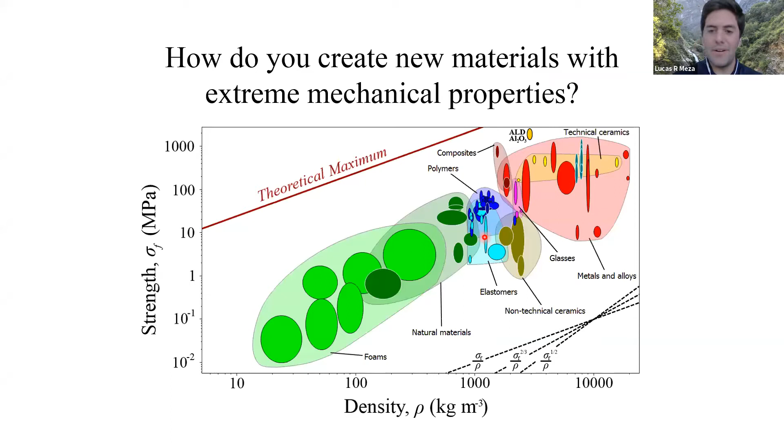And the question was, how do we do that? And the answer that I'm going to give you is we use architecture and we use nanomaterials. So my intro is going to go through those two ideas and where we see it, both in engineering, how we do it, and then why we're doing it. So to start off, architecture.

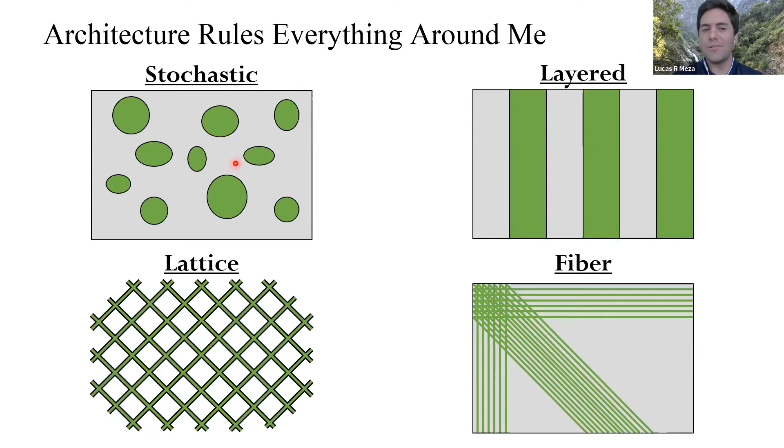So architecture is something that's very common in the world around us. So there's different forms of architected materials that can exist, different shapes that you can have things take on. These are things that you're probably very familiar with, even though it may not make you immediately think of an architected material. So here are stochastic materials you probably have sitting on your kitchen counter. It's a sponge, which has porosity to make it squishable and water absorbent.

Layered materials you're probably wearing on your feet right now, maybe not because you're all at home and who wears shoes at home, but you have multiple layers of the shoes that give it a certain compliance, a certain squishiness to make it comfortable to walk. Lattice materials, anytime you get a box from Amazon or wherever, the corrugation here in the cardboard is what allows that paper material to then be stiff in bending and then strong axially. So you have this corrugated plate that you're using the corrugation to give you some new property.

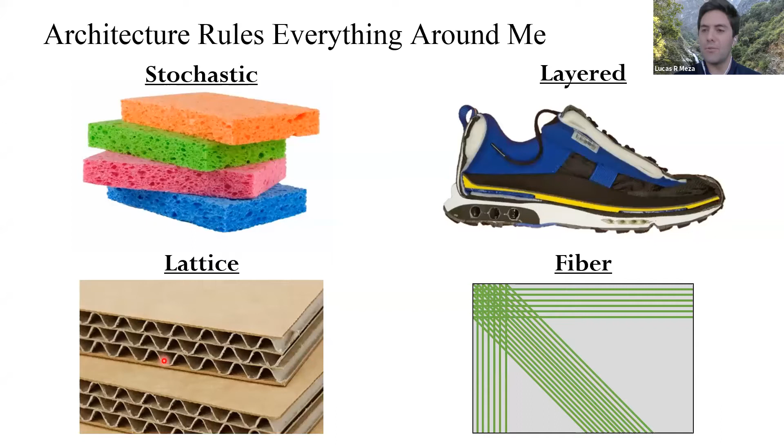And then fiber materials, you're definitely all wearing. Our cloth material, the fabric that we wear every day is actually a woven fiber. So very rarely do we wear monolithic sheets of something on top of us. It's actually very small fibers that have been woven together. And the pattern of the weave and the architecture of the weave is what gives it properties. That extends into carbon fiber composites and other types of fiber composites, ropes or fiber composites.

So architecture in engineering and in the world around us is very common. And that's kind of our starting point for when we think about architected materials, is we want to use some of these concepts of architecture now to design better materials. So architecture has been used all throughout human history. The earliest example was probably straw and mud brick reinforced houses thousands of years ago. In recent years, there's been a set of fabrication techniques that have really allowed us to scale down how we can introduce controlled architecture into materials.

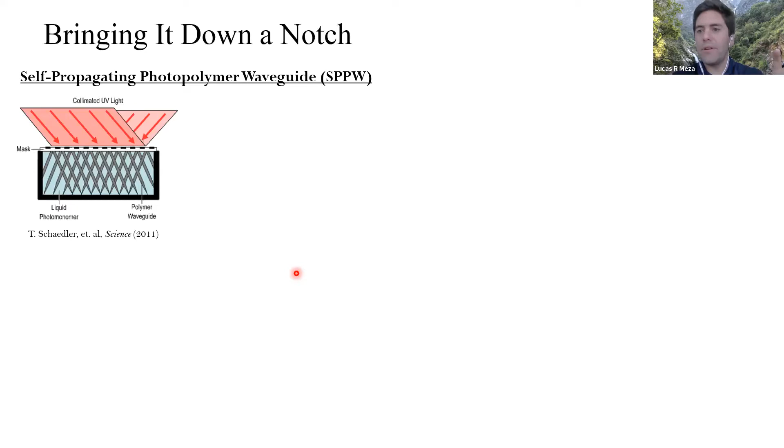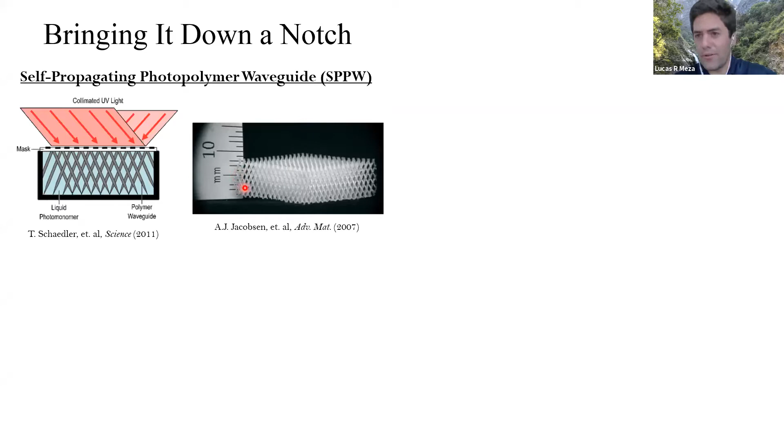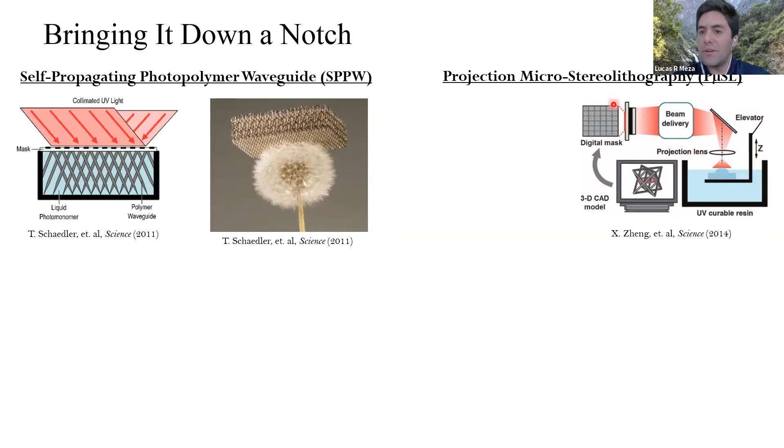Around the same time, most of you are probably familiar to some degree with stereolithography. So like a Form 2 3D printer uses stereolithography. Around the same time as this work was coming out, people were working on microstereolithography, so taking phase masks and putting them through projection lenses to make very small featured structures. So now we could create structures with the same complexity, but with an arbitrary architecture. So here, this is a hierarchical lattice, which I'll talk about a little bit later in my talk.

The technique that I still use here pretty heavily is direct laser writing, or 2-photon lithography direct laser writing, where we take an infrared laser, shine it into a photopolymer, and we're able to make structures that are smaller than these techniques are able to do, not quite as small as a self-assembled block copolymer structure, but we're able to introduce an incredible degree of complexity into something at near fundamental material length scales.

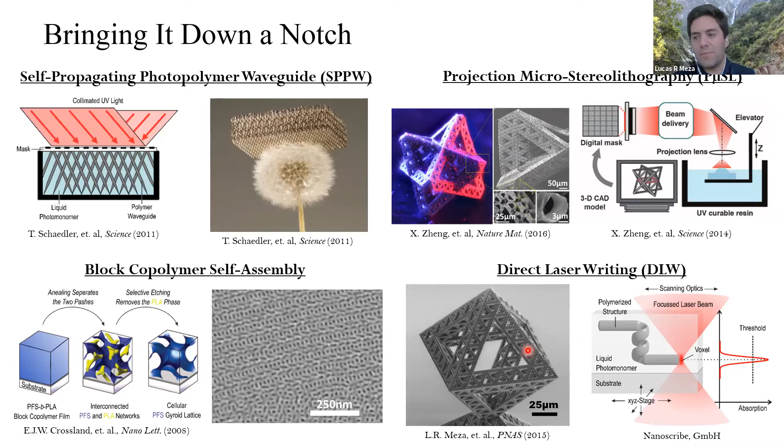So what's the point of that? Why do we want to make things so small? Well, it turns out smaller is sometimes better. Smaller is more interesting. So this was a lot of the work that my PhD advisor Julia had done during her PhD. When you take single crystalline metals and you make them smaller, you get a statistical increase in strength due to a range of effects. But basically, as you reduce this size, your strength gets stronger and stronger kind of exponentially.

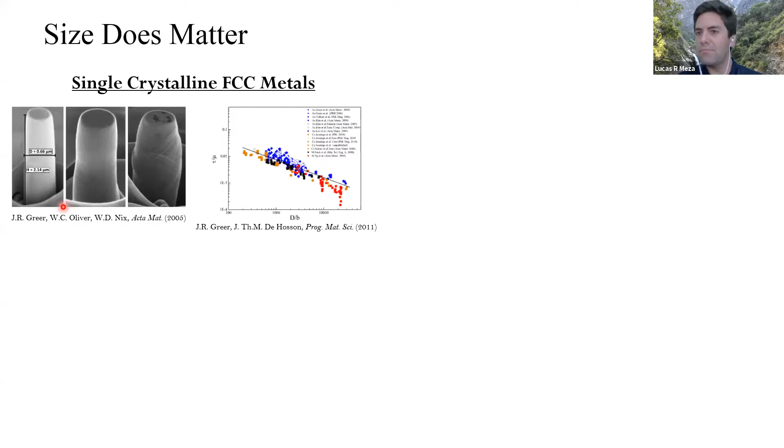So if you're able to make something that's 10, 20 nanometers in diameter, you get near the theoretical strength of the material. For intrinsically brittle materials at the macro scale, you can actually have them become ductile at the nanoscale. I don't know how many of you are familiar with metallic glasses, but it's an amorphous metal material that is generally fairly strong but brittle at the macro scale. You can actually get to length scales where you can suppress that brittle shear band localization, and you can get some ductility into your intrinsically brittle material.

That said, size isn't always good. If you take a nanocrystalline material, adding the free surface actually allows grain boundaries to slide out, so smaller is weaker. So size matters and nano architecture matters.

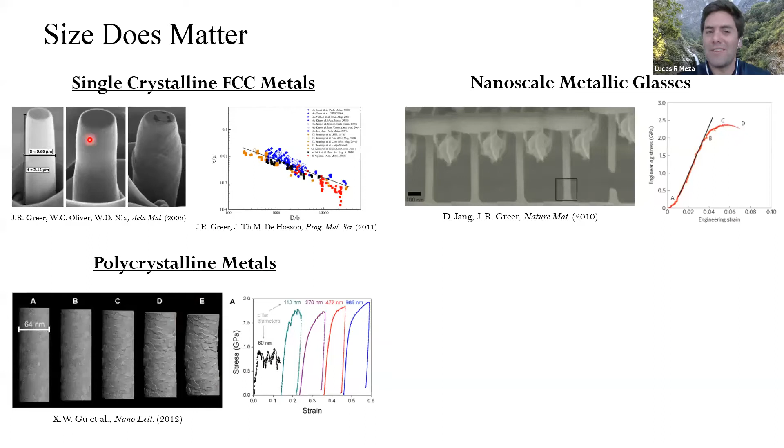So nanomaterials are interesting, and they exist everywhere in the world around us, but the question is, how do we use them? Now we're trying to use this idea of architecture to couple nanomaterials into our mechanical properties. Once we have nanomaterials, we have to decide how we want to shape them. There's a whole bunch of different ways we can create structures with different shapes. A lot of the work I had done early on was on lattice structures.

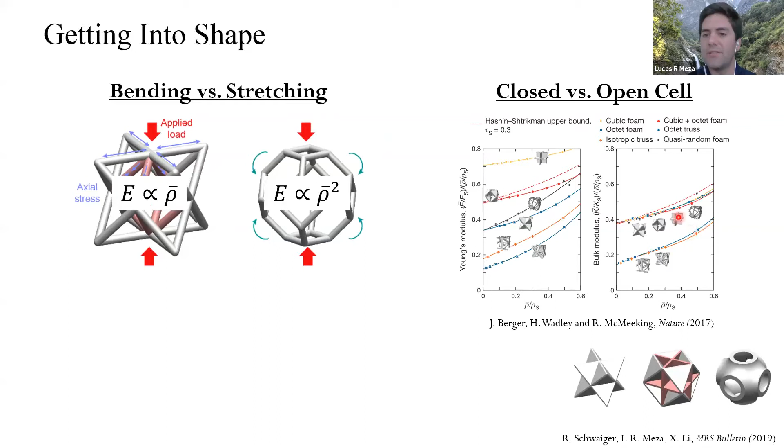In general, though, people have found that lattices don't scale optimally. And actually, if you go to a closed cell architecture, you can get better mechanical performance. Here you can see lattice architectures versus closed cell architectures. Even stochastic closed cell architectures generally perform better than lattices because walls are better at carrying load than beams. There's other reasons why that isn't necessarily ideal, and I'll talk about that also later in the talk.

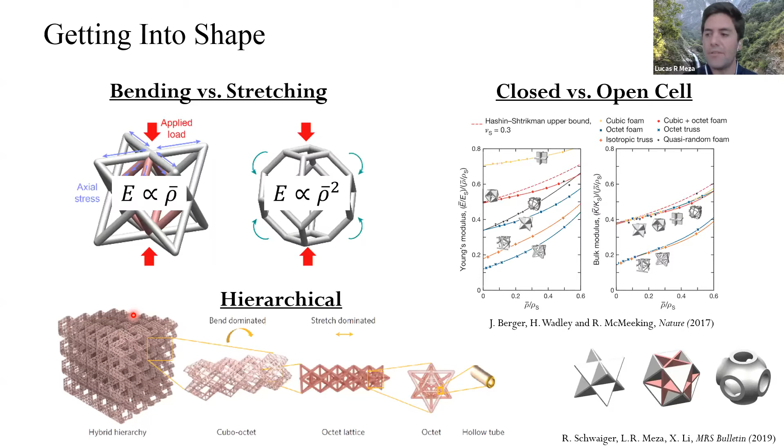And then introducing hierarchy into our geometry. So now that we can make whatever shapes and architectures we want, we can start introducing structures at different length scales to feasibly get different properties. So I could combine a bending structure at a small length scale, a stretching structure at a larger length scale, and a tough or a negative Poisson's ratio structure at another level. And we can do that all in our design. So we can design these different structures at different levels with different architecture to bestow different properties.

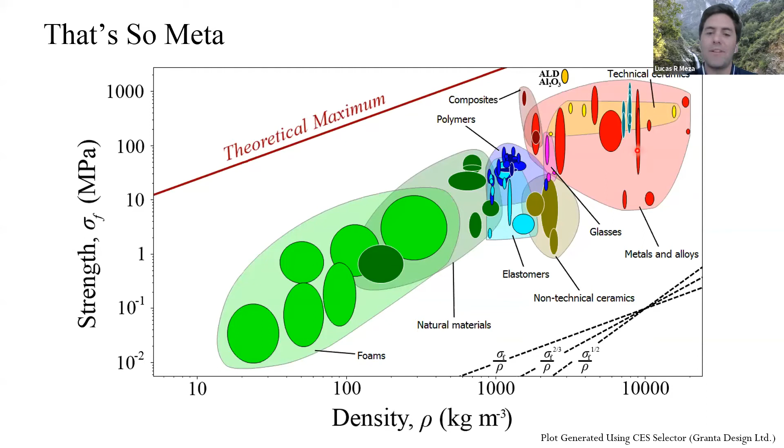What have we gotten so far? So let's go back to our Ashby plot, again, strength versus density. If we look at what some of those fabrication techniques have bought us, it's been able to extend that material property space. So here, we've been able to make things that are fairly heavy and very, very strong. This is amorphous carbon, which I'll talk about later.

We can make lightweight materials that are as light as wood, but as strong as a steel. We can make ultra lightweight materials, which I'll also talk about later in the talk. We can make fully dense materials that are actually stronger than their base materials. So this is a porous copper, which was 60% dense and still had a higher strength than the actual bulk copper that it was made of. And that's because of those material size effects that I had been talking about earlier.

So there's a whole bunch of interesting mechanical properties that we've been able to get, but this is only one narrow slice of the material property space. So this is strength versus density. There's a whole metamaterial property space that we can start to explore with these fabrication techniques, which isn't necessarily what I have focused on, but what there are a lot of people actively working on.

So here we have auxetic materials, or negative Poisson's ratio materials where when you push on them, they contract, and when you pull on them, they expand. Pentamode materials, which are a meta fluid. So if you think of water, water has a bulk stiffness, but no shear stiffness. You can flow water, but you can't compress it. Here you can create a solid material that actually has almost that property. It has some bulk stiffness, but it has a very low shear stiffness. And it turns out that's interesting for cloaking.

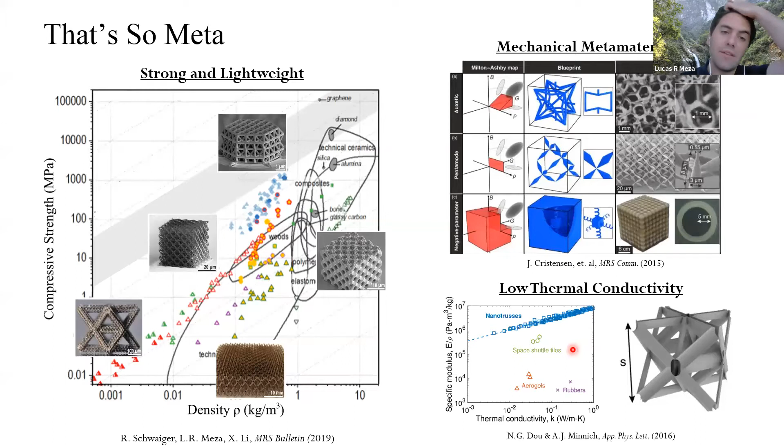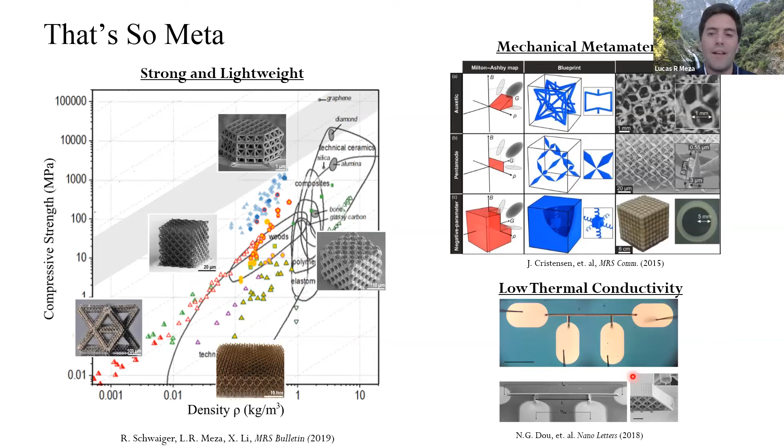And this has applications, for example, as space shuttle tiles, where you can create something that's ultra low thermal conductivity, that's shielding, that's crack proof. And that's really what we're trying to go for with these. So this was a numerical study. They were able to validate some of those properties experimentally a couple years later. So I'll come back to this point later on in the talk.

So now I'm going to talk a little bit about what I had actually worked on prior to coming here, or what my PhD work had been on. So a lot of the fabrication that we do is based around two-photon lithography. It's not necessarily a technique that I'm married to, but it's a useful prototyping tool. So effectively what we have, it's a nano 3D printer.

You shine infrared light into your material. Infrared light alone isn't enough to cross-link the material. So anywhere the red light shines doesn't cross-link, it just stays a gel until you get to a very narrow focal point. And here, at this narrow focal point, you have a statistical likelihood of getting 2 infrared photons absorbed. So those 2 infrared photons have the same energy as 1 UV photon, which most of these photoresists are designed to cross-link using. And so you only get cross-linking at that focal point.

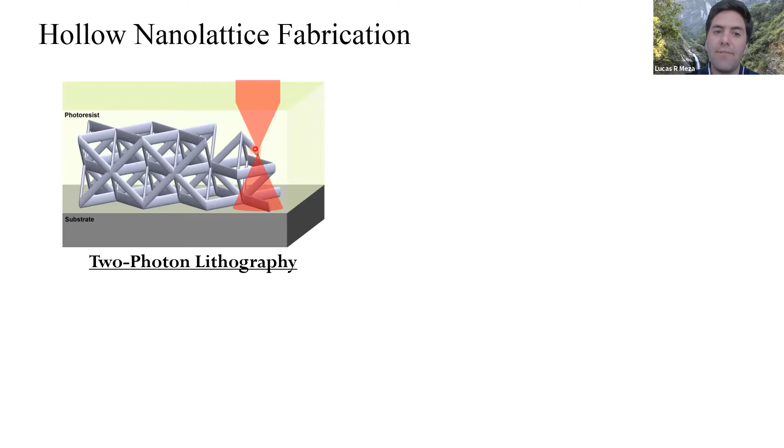And so what this looks like, there's actually a couple different writing modes you can use. Here, you can actually write fully 3-dimensionally. So you're not limited to layer by layer writing.

You can see there's a piezo stage that this is attached to, and it's writing these octahedrons fully in space. Or you can do layer-by-layer writing, which is generally faster, but then you get the stair-stepping phenomena that you see with most 3D printers.

At the end of this, you end up with a photopolymer, or polymer structure. That polymer alone has some interesting properties, but most of the time we use it as a scaffold, so we take that polymer structure and do something to it. In my PhD work, that involved using thin films to coat it. We're still doing some of that here, but we're also using pyrolysis to turn it into different materials.

So here, that coating process: you take a polymer, use a thin film deposition technique such as atomic layer deposition to coat it with a thin layer of something, in this case aluminum oxide, because you can ALD any material as long as it's aluminum oxide. We take that aluminum oxide, use a focused ion beam to narrowly expose the edge of the material, use an oxygen plasma to burn it out, and we end up with a hollow structure.

So I'll show a few videos now on these hollow alumina lattices, hollow alumina nanolattices, and what their properties are. Dimensionally, we can control the thickness of ALD effectively to the nano level, to the atomic level. We can get 10 or sub-5 nanometer thin films of aluminum oxide, which is effectively 15 to 30 atoms across. So we're really getting down to the scale where we're controlling the atomic organization of these structures.

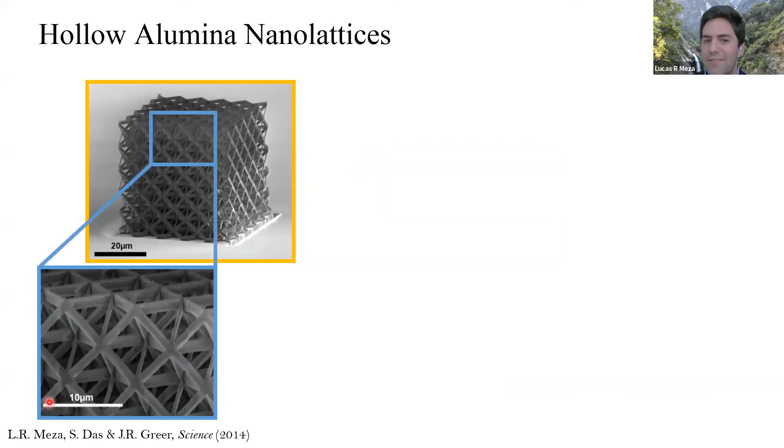So 50 microns total structure. These are built with unit cells that are on the order of 5 to 10 microns. And then at the smallest level, these are hollow tubes with thicknesses on the order of 10 to 100 nanometers, which we can control pretty well.

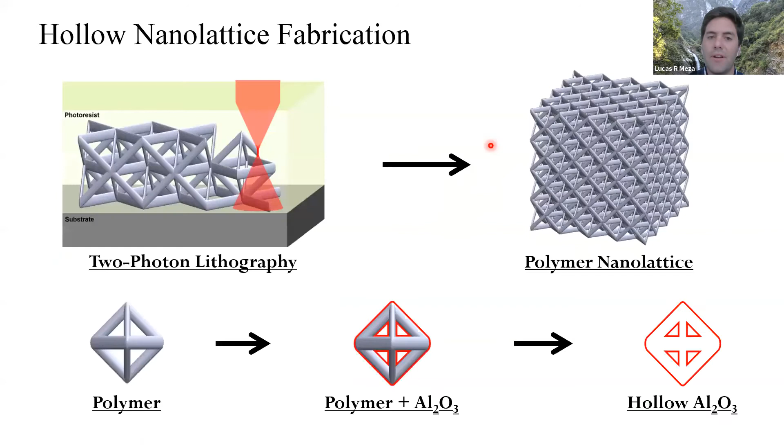So this is a cut section - this is an octet truss, hollow. Again, you have the size of the structure, the aspect ratio. Unfortunately, as a byproduct of the fabrication process, you end up with an elliptical cross section. So two-photon lithography gives you an ellipsoid as your unit, which is not the end of the world, but it is what it is. You can build it up to make circular structures, but then you have larger features, and the mechanics change slightly. I can talk more about that if anyone's interested.

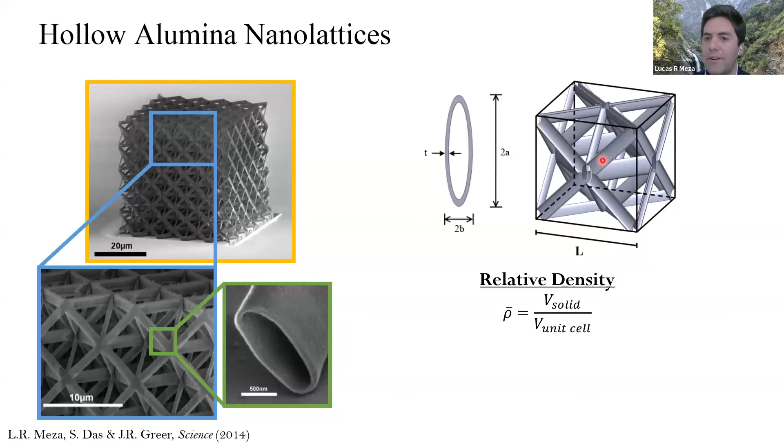But there's a couple figures of merit for these materials that I'm going to point out now. First is relative density - anytime you're making a lightweight material, the amount of material in there, the volume of solid over the volume of the unit cell, is the most important figure of merit. From there, you can approximate certain mechanical properties. Certain things like stiffness and strength were theoretically said to scale with relative density, depending on what the constituent material is and how much stuff is in there - so the relative density to some exponent. It turns out to be a little more complicated than that, which I'll get into, but that's the basic idea.

So now I'm going to show a video. This is our alumina nanolattice. Alumina, remember, is a ceramic - brittle, catastrophic failure. If you compress it, think about compressing a coffee cup and what you would expect to happen, or dropping a coffee cup. It's kind of a brittle, catastrophic failure.

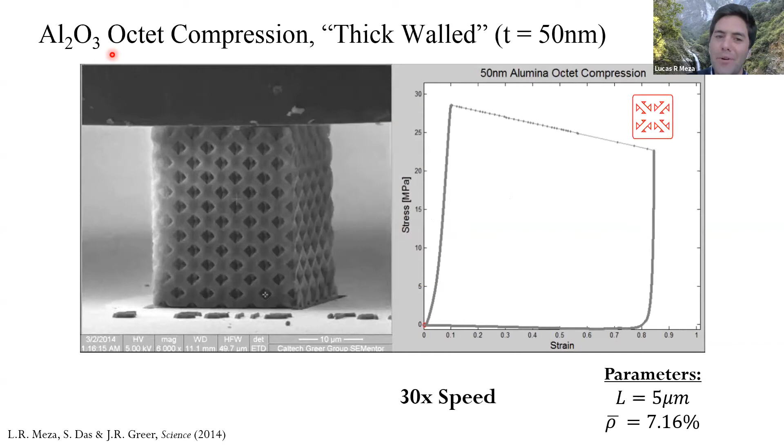So this, I'm going to say, is a thick-walled structure, thick here being 50 nanometers - that's the length scale we're working at as a frame of reference. In compression, we get reasonably high strength, reasonably stiff performance, but brittle, catastrophic failure. There's a single large strain burst, and the whole structure crushes.

It was pretty light, it was pretty strong. As an engineering material, those are useful properties, but if you imagine using this as part of an airplane wing, you wouldn't want your wing catastrophically exploding in midair. So how do you get around that?

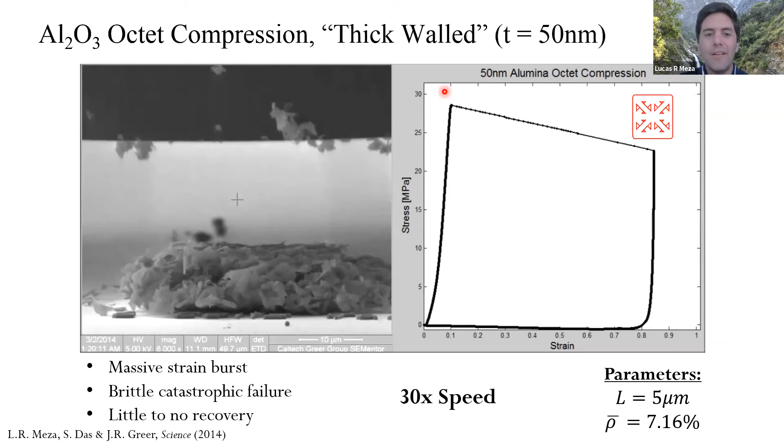So here we had taken that same Alumina octet, used the same architecture, the same material, the same geometry, the same everything, but now reduced it to be thin-walled. So here now this is 10 nanometers instead of 50 nanometers. We kind of came upon this serendipitously, and what we found in playing around in this parameter space was quite a different behavior.

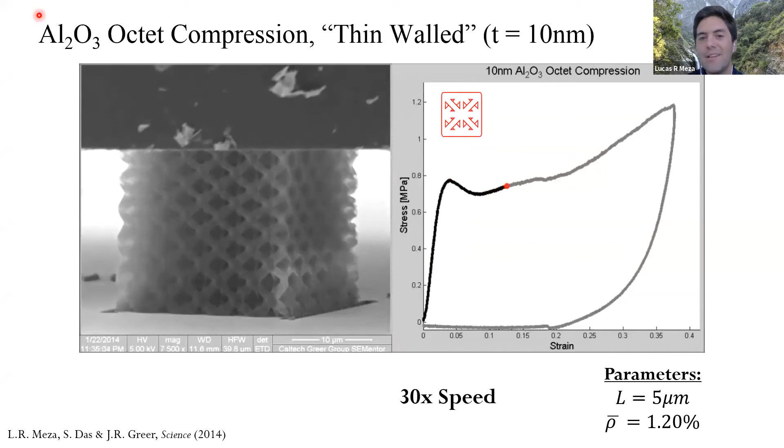Now, instead of that catastrophic brittle failure, you can see this gradual ductile deformation up till about 40% compression, then we unload, 40% compression, then we unload. And actually it bounces almost all the way back. Some of these structures actually recover 98, 99% of their original height, which is pretty remarkable given what we had seen for the fully dense, or thicker walled structure.

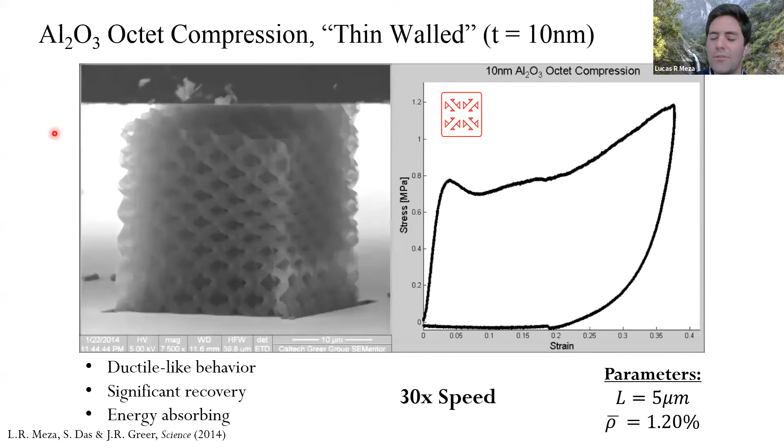So what's happening here? This 10 nanometer one, across all these different unit cell sizes, was able to recover. There's a gradual transition as we increase that wall thickness from a ductile recoverable behavior to a catastrophic brittle behavior. What's fundamentally happening is when you compress this thing, you have a hollow, thin shell that, if you imagine trying to crush a piece of paper, isn't going to fracture, it's going to wrinkle. So here we're actually seeing wrinkling or shell buckling in the wall, this hollow ceramic wall.

After we unload, we do see cracks form. There's some cracking that exists, which is why we don't see full recovery. But globally, the node remains intact, so the structure is able to recover. There's no plasticity mechanisms because it's a brittle material, so it's either broken or it's not broken. And if it's not broken, it's able to bounce back, although it loses some of its integrity.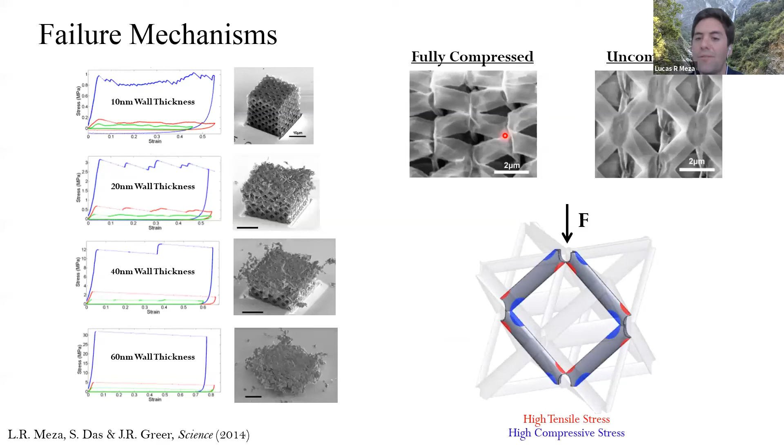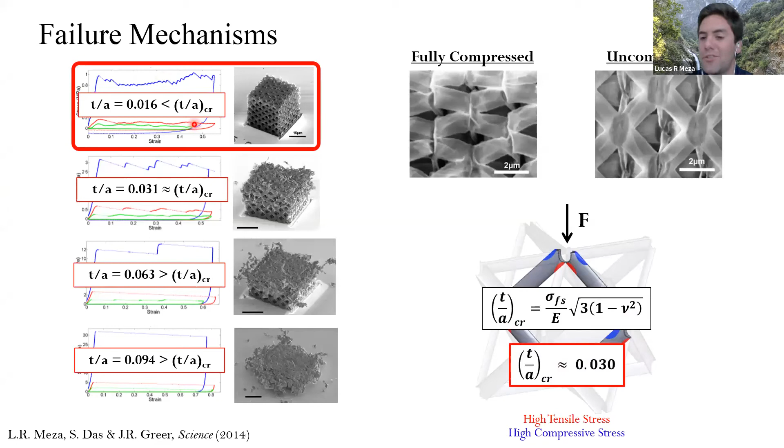So here we can determine a transition between those two behaviors. If you look at a cross section in compression, you have regions of high tension and high compression, and basically a competition between rupture in areas of tension and buckling in areas of compression. You can relate those two, and say either it's going to fracture or it's going to buckle. We have a relationship for shell buckling, so you can come up with a critical transition point, plug in some material properties, and say anything below that critical transition, i.e. our thin walled structures, will be shell buckling dominated and able to recover. I'll come back to that a little bit later in the talk.

We played around with hierarchical nanolattices too. I'm not going to go into this too much, just going to show it off because they're cool pictures, and there's a nice video that goes along with it. So here, this is a third order hierarchical structure. It's a lattice made of lattices. You can see the lattice subunit there, the lattice unit there, and then the lattice there.

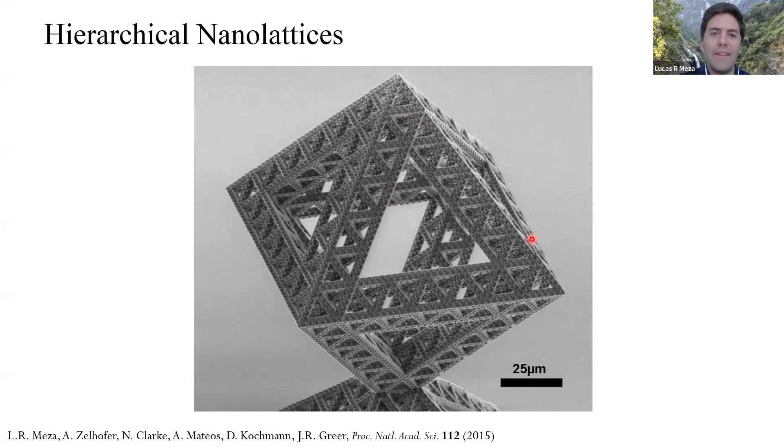So here, I'm going to show you cyclic compression on a third order half cell. Basically what we were looking for was how this hierarchy in a single beam changed behavior. So here you had a stiff, strong initial loading cycle. After that, you can actually see some of these cracks and voids starting to open up. You can see, especially here and here, cracked parts of the beam.

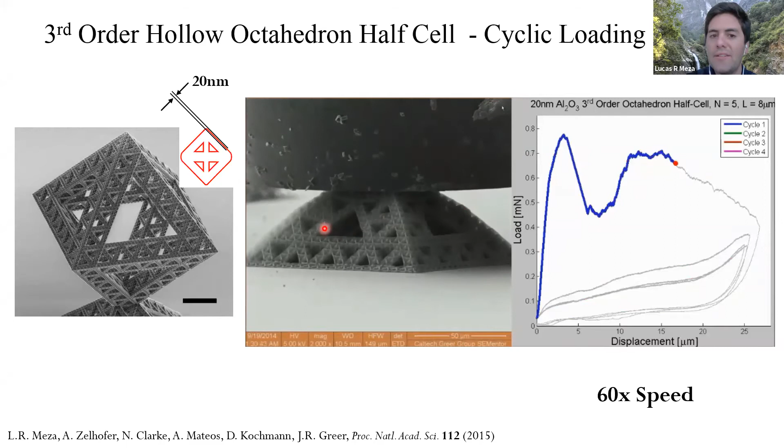Cracked parts of the beam stay cracked, and you have basically buckled pathways that form, which reduce this initial peak load. But then you get to a pretty stable load cycle after just one or two cycles. So even though you lose a lot of that initial integrity, you're able to recover a bit better.

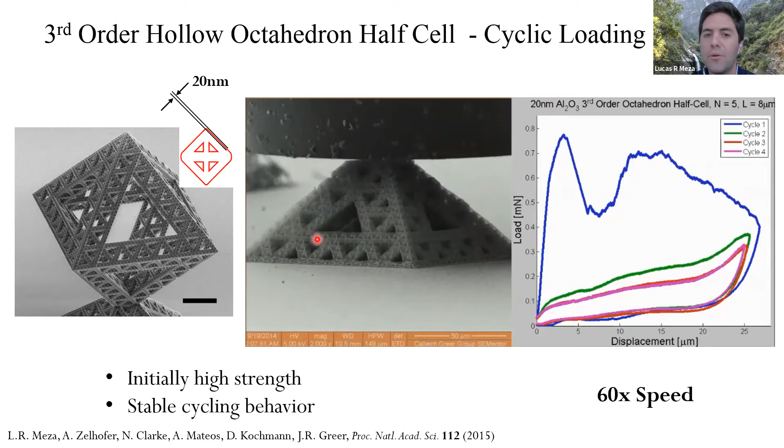So what this hierarchy buys you for this particular lattice is you're able to localize the failure more. You're able to localize failure to discrete beams in the structure instead of parts of the shell wall, and that inevitably gives you better recoverability because more of the node or more of the beam stays intact. So I'm not going to dwell on that too much.

Here, I'm going to pull us back to our property space. You'll notice I extended this out quite a bit. Here's that density versus strength. You'll notice here at the top, this yellow bubble is ceramics. Here, that ALD alumina, ALD Al2O3, this is the material we were using. It has yield strengths on the order of 2 gigapascals, much higher, especially in tension, than a normal bulk ceramic would be.

From that, now we can see this is where our monolithic lattices fell. If I drew a line up to that, this line would effectively intersect my ALD alumina. So we're getting higher strength, or higher stiffness, at the same density than normal foams. That's primarily driven because we're using a stronger constituent material.

For the fractal lattices, we were actually able to get ultra low weights, which was interesting. If you imagine cranes in construction, the reason we use cranes is because you can extend your size while reducing your weight. You wouldn't want a solid steel beam as a girder for a crane. So here, effectively what we're doing is creating a structure that mimics that.

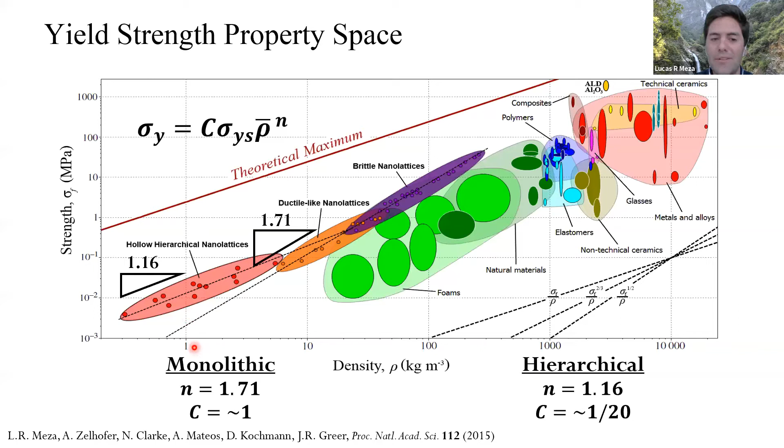Interestingly, as a frame of reference, the density of air is about 1.2 kilograms per meter cubed. So we were actually making structures that were about a third or a quarter of the density of air. That technically makes these air composites, because air makes up a considerable fraction of the weight of them. Anyway, I won't dwell on that too much, just a fun fact.

But here you'll notice if I draw that Voigt line from my ALD Al2O3, that straight line, we're about a factor of 20 off from where we theoretically could be. So here we're getting good performance, we're getting ultra lightweight, we're reaching new property spaces, but we're still really not reaching into this white space the way we wanted to.

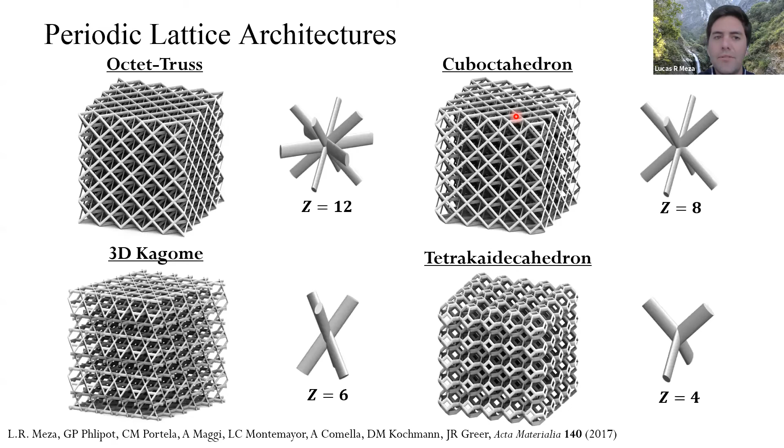At this point, I had a question of why are we using lattices and what's the point of using lattices in these structures? So we went through a whole bunch of different types of lattices. Here's 4 that we ended up focusing on: octet truss, cuboctahedron, Kagome, and tetrakaidecahedron, made lattices out of those. These have different connectivity at their nodes and theoretically are rigid, periodically rigid, or non-rigid.

What that means is, this octet truss is a pin jointed 2D version. This is fully triangulated - if I push on it, it doesn't move. This has no triangulation - if I push on it, it falls apart. And then the cuboctahedron and the Kagome, basically anywhere those triangles are is a rigid element, and then you have periodic deformation around those in theory.

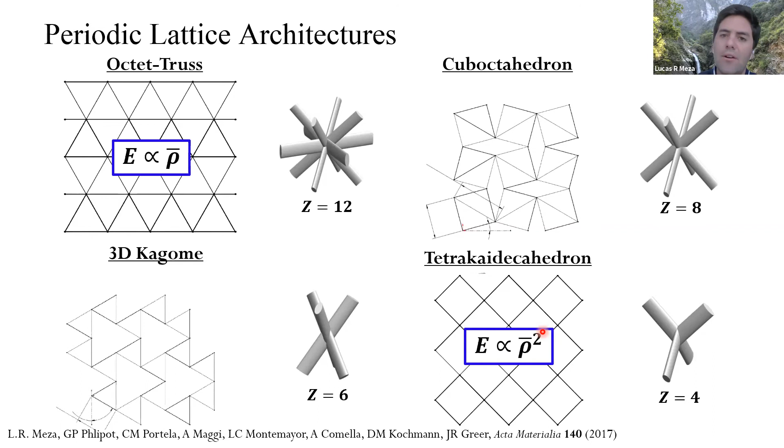So those are in principle supposed to scale linearly with relative density, and quadratically with relative density. This is kind of what all the lattice theories had told us, or at least what we were starting to go on. So when we look now at a property space, here's those 2 scaling lines: E is proportional to rho bar, E is proportional to rho bar squared.

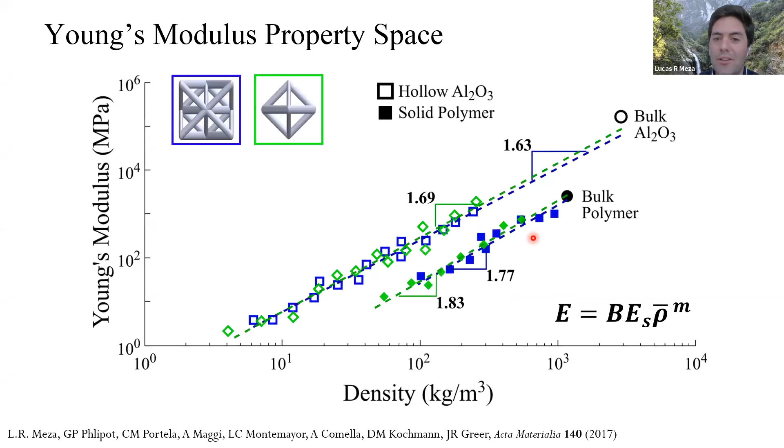We actually didn't see that behavior at all. If we look first at the octet truss, we see it's neither the squared nor the linear scaling, both for hollow and solid beam structures. For the cuboctahedron, Kagome, and tetrakaidecahedron, all of these actually collapsed onto each other very strangely. So it seemed at first glance that architecture had no role at all - that all of these different lattice architectures, even though this was supposed to be stretching dominated, this was supposed to be bending dominated, actually didn't make a difference, which was somewhat off-putting.

So we dug into it a bit more. Here, these are our experimental parameters, or experimental values. We did corresponding numerical simulations to match those, and we found that basically in the relative density range we were exploring, the beams themselves weren't the dominant factor controlling the mechanical properties.

It was actually the nodes. So here, when you make very dense structures, the nodes take up a considerable volume fraction of your material, and you can't consider this as a beam-based structure.

It's a combination of beam and node structure. And so when you get to very low relative densities, you actually get to that theoretical scaling that you're supposed to have, but here at high densities, you don't have that. And so in a practical sense, it's very difficult to make structures that are much lighter than 5-10% relative density, because you start ending up with them collapsing under their self-weight. Any sort of imperfection can lead to catastrophic failures. And so this was a problem.

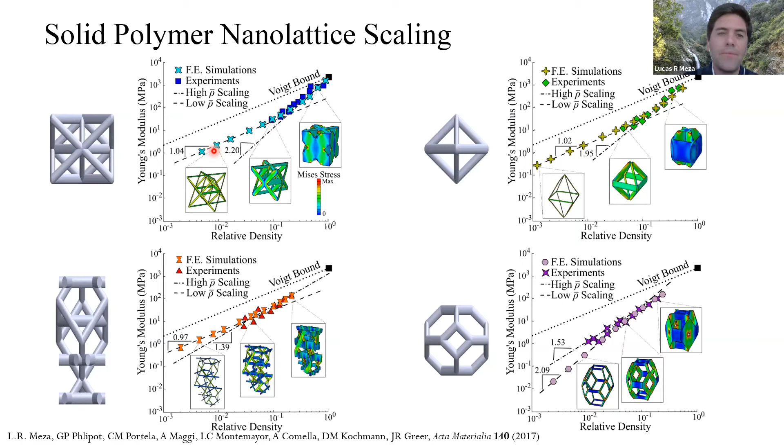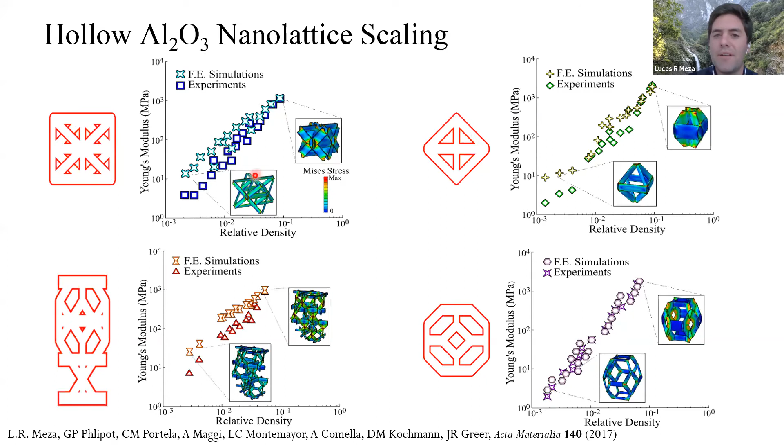So it seemed for a second that lattices weren't necessarily the way to go. Shell structures are supposed to scale more optimally. And so here, those are our shell results. We ran corresponding numerical simulations on matching parameters, and then we looked in a little bit more detail on different parameters. So here, those are our experiments. These are our matching parameters. When we started looking at different property spaces, we actually saw pretty drastic shifts in behavior.

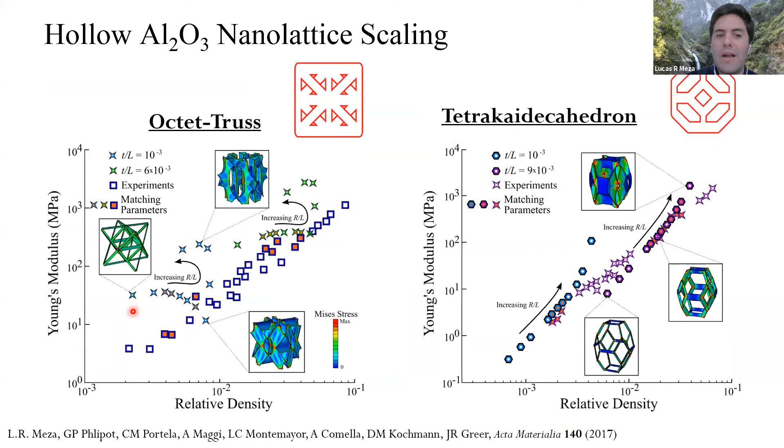So there were actually odd transition points where at the same relative density, you could get an order of magnitude change in properties by changing exactly how the load was being carried by the shell. So here you have load concentration points, sharp corners. Here it gets to the point where it's just rounded out enough where you transfer the load differently in the shell wall, and you're able to drastically increase your performance.

These were numerical simulations. We haven't actually done the corresponding experiments to validate these, but there's other reasons that we haven't, and I'm going to get into those a little bit later. Recoverability. I have 15 minutes left, so I have one more slide on stuff that I've done before, and then I'll get into stuff we're working on.

So recoverability was the other big question. So there was a question of how do we make stuff lighter and stronger? How do we push this way in the relative density space or in the stiffness strength density space? But then there was also this other issue of recoverability. So we wanted to quantify the amount that these structures recovered. This is a Kagome lattice compression.

We defined a figure of merit, percent strain recovery, maximum minus residual strain. So if it recovers fully, then you have a percent strain recovery of 100%. If it doesn't change at all, if epsilon residual is equal to epsilon max, then you have 0% strain recovery. And so, for example, this is 68% strain recovery.

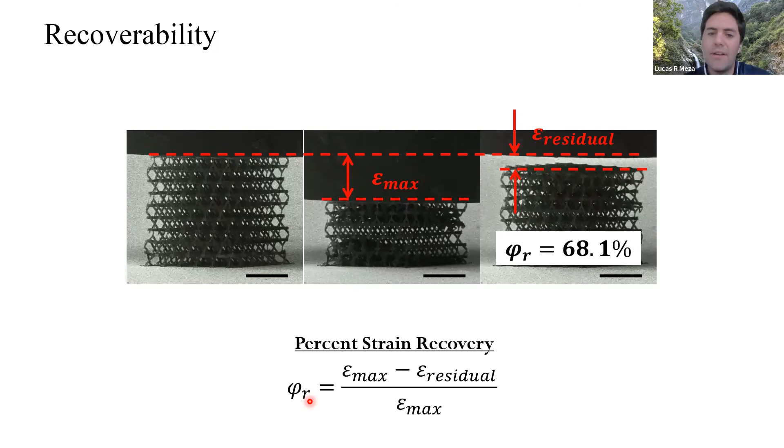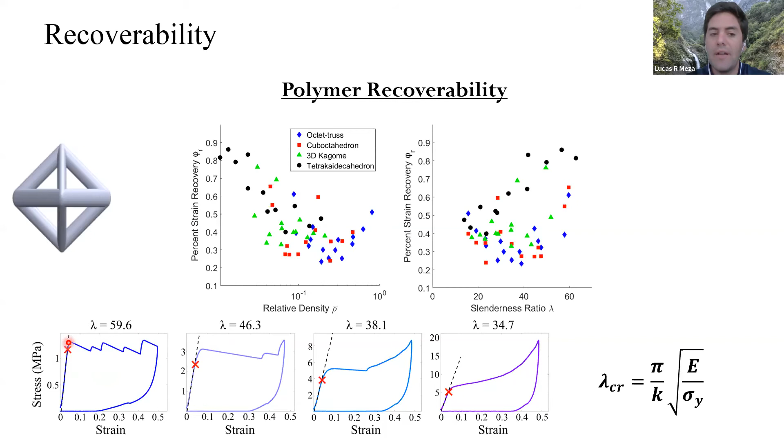So we looked at polymer structures. With polymer structures, you can define a figure of merit lambda to define the slenderness of a beam. You can relate that to the buckling limit of the beam, and you can find a critical transition where you will go from an Euler buckling dominated to a yielding dominated behavior. And so you can see here the qualitative changes in behavior, the sort of bursting event. These are Euler buckling events, and this is a densification and plastic yielding.

But we found that slenderness of the structure didn't actually correlate very strongly to recovery, and more so the density loosely correlated with recovery, but even then there wasn't a strong trend, especially across all the different architectures that we looked at, which was interesting.

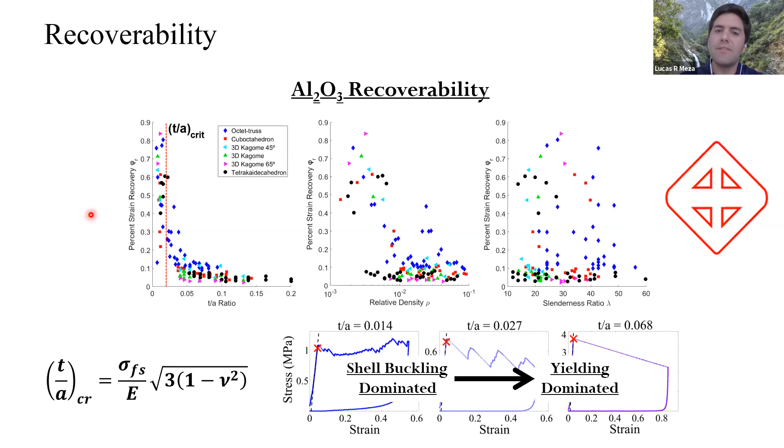But we were still seeing structures that had a fairly low T over A that didn't really recover. So you notice there's a very wide spread, even when we get past this ratio, where some structures were and some structures weren't able to recover. So this was kind of a weird open problem. And this is one of the big things that I'll get back to. So that is basically most of the work that I had done during my PhD.

I'm now going to get a bit into what we're actually working on now. So the problems that we've been trying to address, how we've been tackling them, what questions we're trying to answer. So one of the big questions that we had was, how do you increase specific strength and specific stiffness?

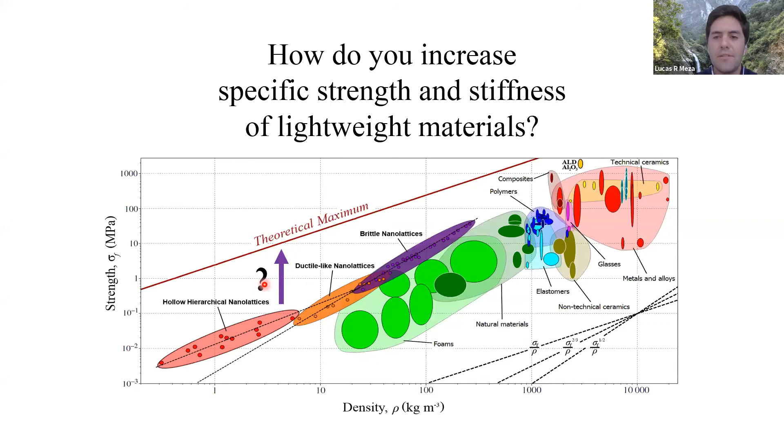So how do you go this way in our property space? We made these ultra lightweight materials. There's a lot of room to move up. How do you get there? And so shell structures, I'll get into in a couple slides, may not actually be the best way to do this. There's a different architecture that's actually more interesting, and that's called a tensegrity structure, or a tension integrity structure.

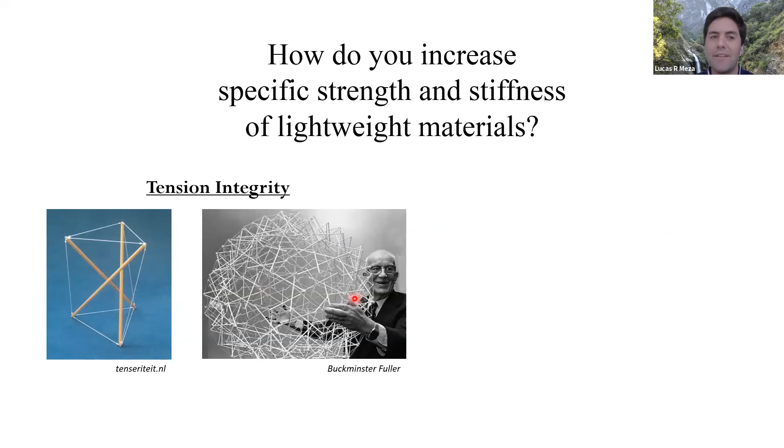This was coined by Buckminster Fuller, kind of an eccentric inventor back in the 1950s. But you have effectively isolated tension and isolated compression events. So if you design an architecture in a particular way, you can make it such that some elements in this only carry tension and some elements only carry compression. Now, in compression, elements can buckle, but in tension, they can't.

I'm not gonna get into that. You can have stuff buckle in tension, but that's a more complicated problem. Generally, for monolithic beams, you don't have things in tension buckle. And so here, you can make your tension elements much thinner and much lighter than your compression elements because you don't have to worry about them buckling.

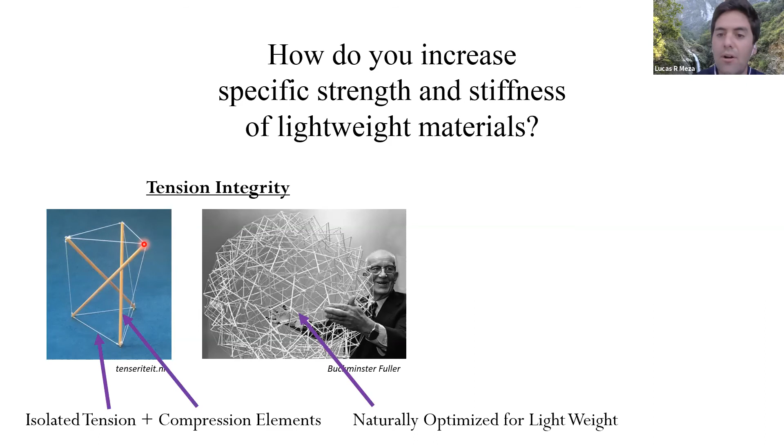In cells, the shape of the cell is actually dictated by the actin-myosin network. Inside of them, you have these actin tubules, myosin filaments that form a tensegrity network. So some are acting in tension, some are acting in compression, and it's that tension compression network that gives you the shape and the flexibility of a cell, combined with that phospholipid bilayer that gives you a protective membrane.

In our bodies, your skeleton actually doesn't hold you up. If you just had a skeleton standing on its own, it would fall down. And it's actually the muscles, specifically the tension in the muscles, that form a tension compression network in your body. So bones are thick and heavy and are primarily designed to act in compression, your muscles are designed to act in tension. And so that idea of this tension compression network naturally gives us an optimized lightweight structure.

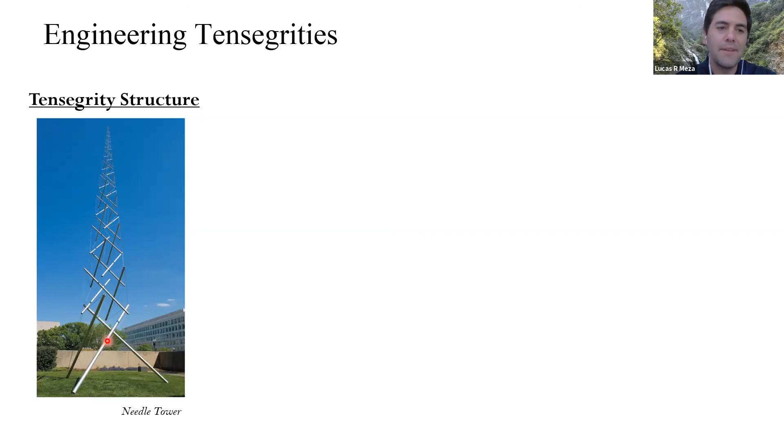So in engineering, we see a couple examples. These have been around since about the 1970s in the common vernacular. This is a nice structural example. This is a needle tower in Washington, D.C., where you get these kind of wild-looking art structures that stretch, I think this is 60 feet into the sky with something that looks like nothing is holding it up. So it's kind of suspended there.

This, in principle, is actually used in engineering a lot. For example, in suspension bridges. Suspension, you have the bridge itself and the main support columns acting in compression, and then the rods acting in tension. This is the Kurilpa Bridge in Australia, which is actually designed to look more like a tensegrity than a normal suspension bridge, so it looks cooler.

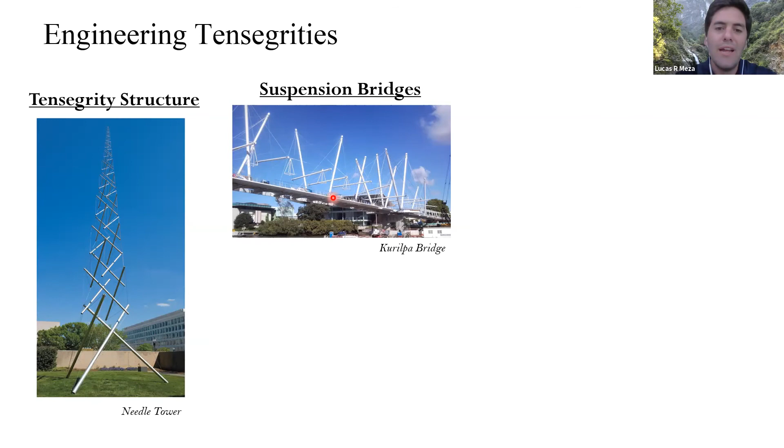And similar to the way the human body works, tensegrities are often used in deployable structures or actuatable structures, especially for space applications. So similar to the way we can move our bodies by changing the amount of tension in our muscles, we can change the shape of a structure by changing the tension or by changing the extension of different elements in there.

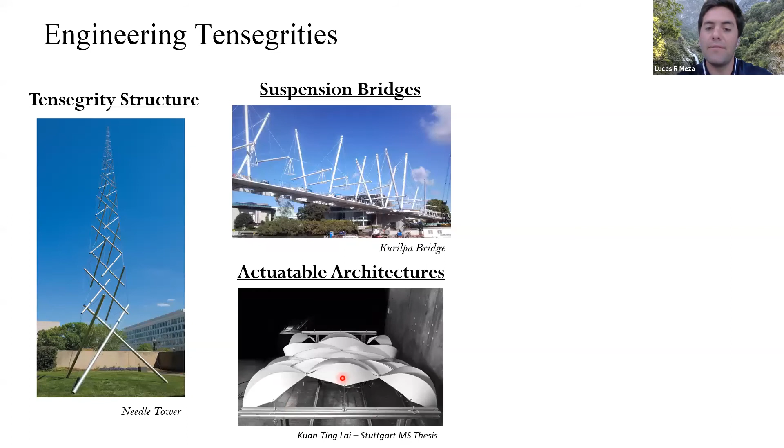If you increase that tension, you can actually get stiffer or weaker responses. So weaker responses would be less tension, stiffer responses would be more tension in that element. And so we can use this idea of pretension to control the mechanical response of the structure.

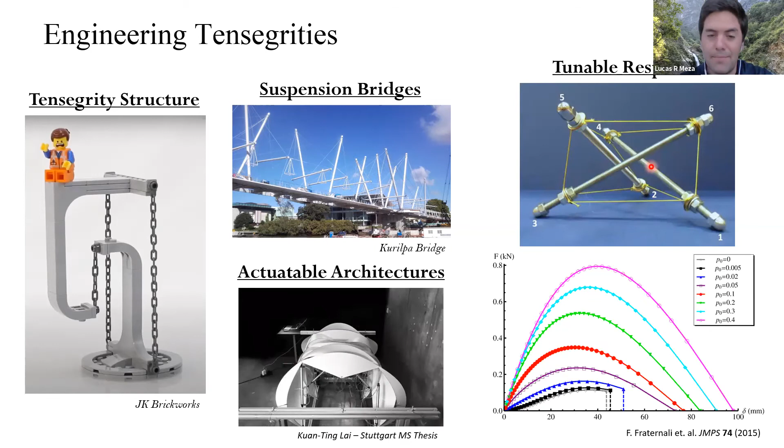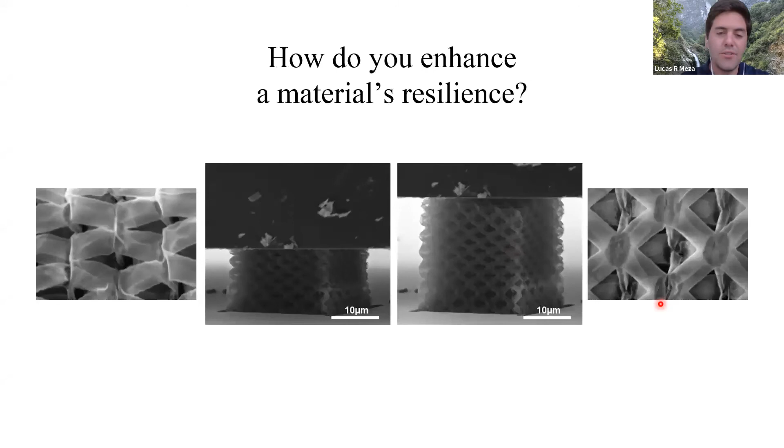The other big question that we had was, how do you enhance a material's resilience? You remember that these hollow structures are dominated by shell buckling. So you have wrinkling of the shell wall, you still have cracking that forms. And so we wanted to figure out how to get around this problem, how to make structures that wouldn't crack. This is inherently a buckling dominated process.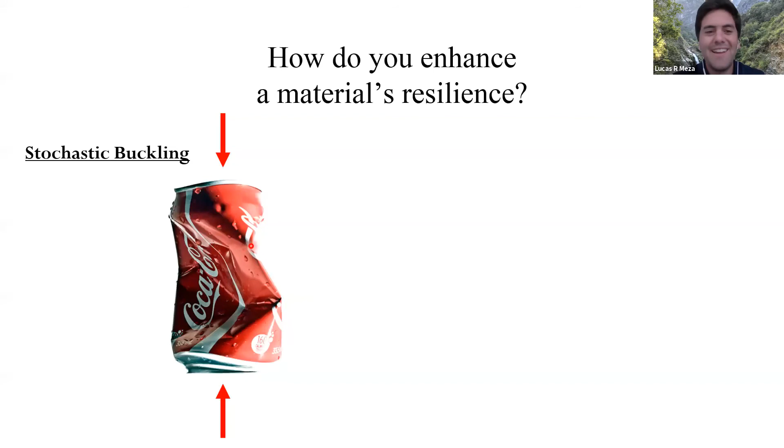You can think about this in the context of a soda can. If you step on a soda can, it'll kind of buckle randomly and take on some random shape. It ends up getting sharp corners, sharp nodes. Those sharp corners will actually be failure nucleation points. You'll get holes that start to pop in here, which is particularly bad if you want to then unbuckle it and reuse it. So how do you get around that?

One potential answer that we're looking into now is origami. I have a student, Andrea Exil, that is working on this. If you take a sheet of paper and you apply boundary conditions and loads in just the right way, you actually get very ordered patterns. This is an example of a Kresling structure. Kresling is an artist who makes these types of origami structures. So we're looking at creating now nano-engineered shells.

I'm going to make a quick point too about why we aren't actually going down the avenue of using shells to make lightweight structures. This was some work by NASA in the 60s: when you have very thin shells, as the aspect ratio of the shell is increasing, you have an empirical knockdown on the peak strength that shell can carry.

Here our structures were in a relatively low aspect ratio regime. That shell buckling formula that I had before, E times T over R, there's actually a gamma out front that I conveniently ignored. And this knockdown, this gamma, can drastically decrease your properties when you're making very thin shells.

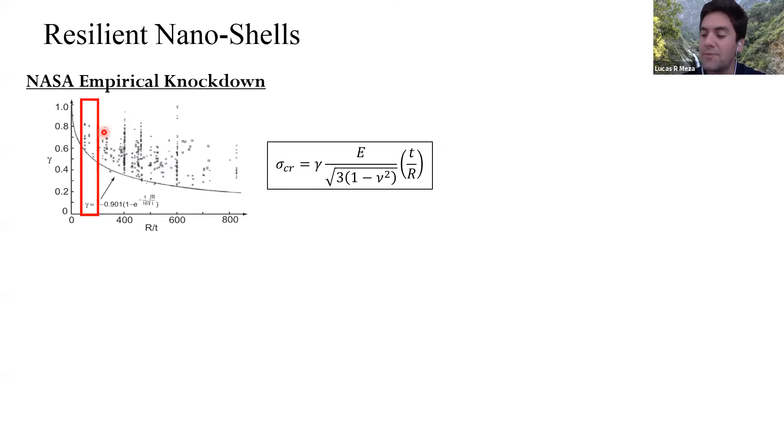So you get about a factor of 5 decrease in the load carrying capacity over what it theoretically can carry, which means that shells are highly sensitive to imperfections, which means if you want to make an ultra lightweight structure, you actually run into this problem very quickly because shells aren't optimal.

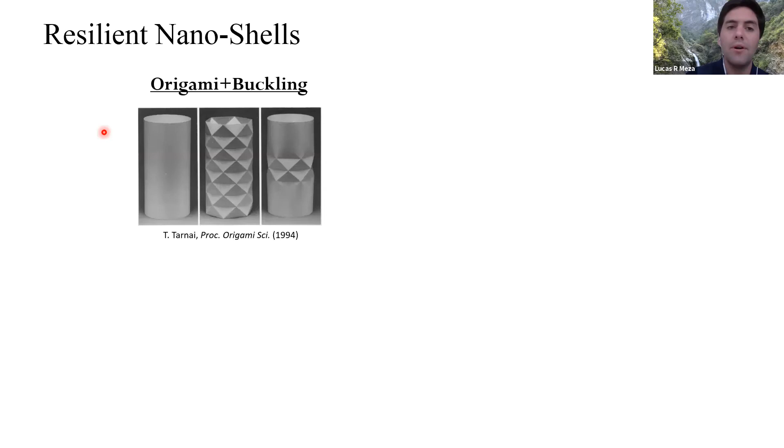But another interesting avenue that we can look into with shells is controlling how they deform. So we're combining this idea of origami and buckling now. This is, again, some work that my student Andrea had been working on. We're creating these nano-engineered Kresling beams or nano-engineered origami structures that we will eventually coat with a thin film of alumina, hollow out, and try to compress to see if we can engineer the recoverability of a beam.

Coincidentally, for those of you familiar with work by J.K. Yang, he works a lot on origami beams. I don't know if he's actually in the talk. If he is, JK, you should talk to me about making nano origami.

One of the interesting papers of his that I've been drawn to recently is on memory in these. You can create bistable states that these origamis can take on, which means we could, in principle, create a nano memory using nano-architected origami structures.

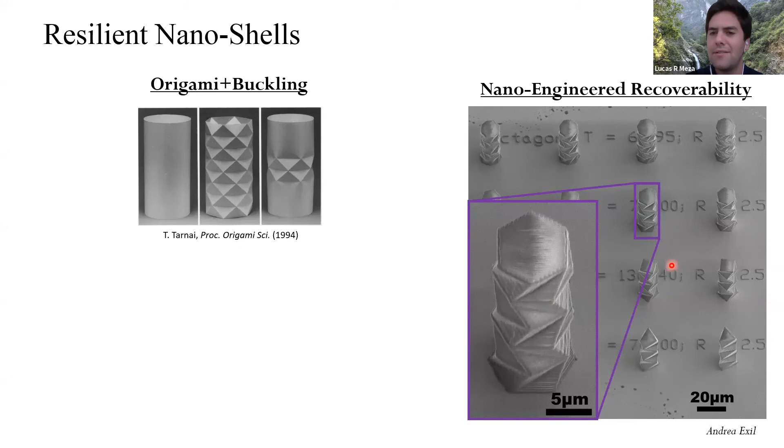I'm running out of time. In parallel, I have another postdoc who started working with me recently, Nishita, who's working on spinodally decomposed structures. Spinodal decomposition is actually a way around the cracking at the sharp corners of lattices, by creating rounded out structures. There's a few groups who have been working on spinodally decomposed structures, which are semi-random smooth surfaces.

Nishita is actually working on creating gradient structures, with the specific interest in creating thermal shock resistance. Thermal shock resistance is the ability of a material to withstand large sudden changes in temperature. It's governed by the thermal expansion coefficient and either the strength or the toughness of the material normalized by its stiffness. It turns out when you're creating ultra lightweight materials, you actually get a benefit to your thermal shock resistance.

So you can create very lightweight materials that have an increase in thermal shock resistance with decreased density. Coincidentally, conveniently, we can create ultra lightweight materials that have ultra low thermal conductivity. So we're looking at applications of these in thermal swing coatings, thermal shock or thermal barrier coatings, and other high temperature applications where thermal shock resistance is needed.

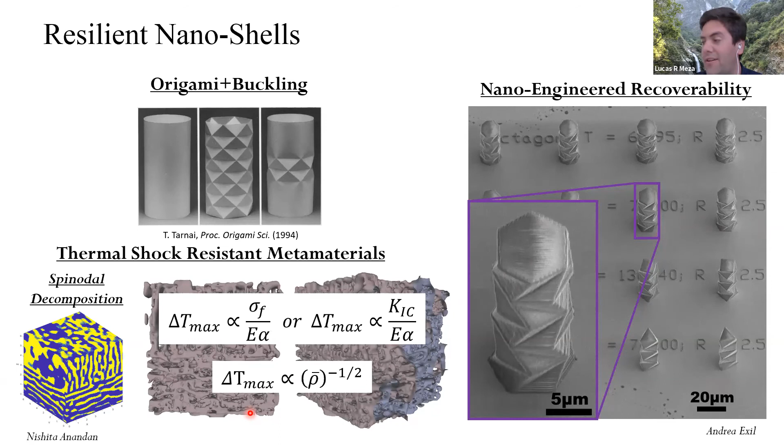Okay, technically at time, I have one more area that I want to talk through, and that's fracture toughness. So this is a fundamentally different area than I had looked into before, and I have a couple students now working on it, one in particular, Zainab Patel, working on how to create tough materials. So this is another Ashby plot, fracture toughness versus Young's modulus. Here you have stiff and tough materials, which are metals and composites. Here you have technical ceramics, which are fairly stiff and strong, but really have a low toughness.

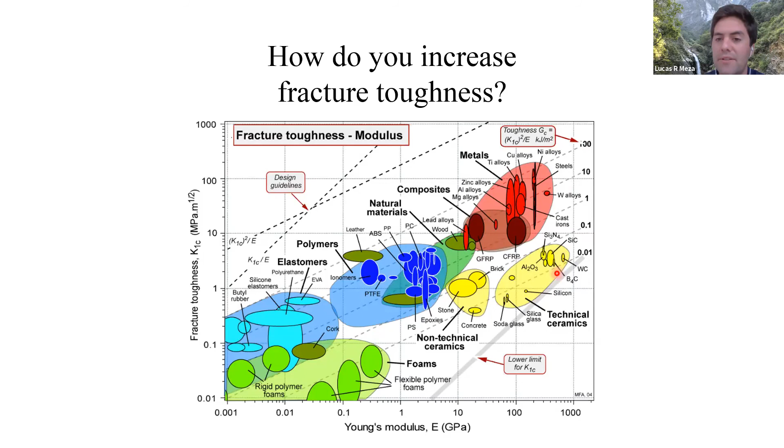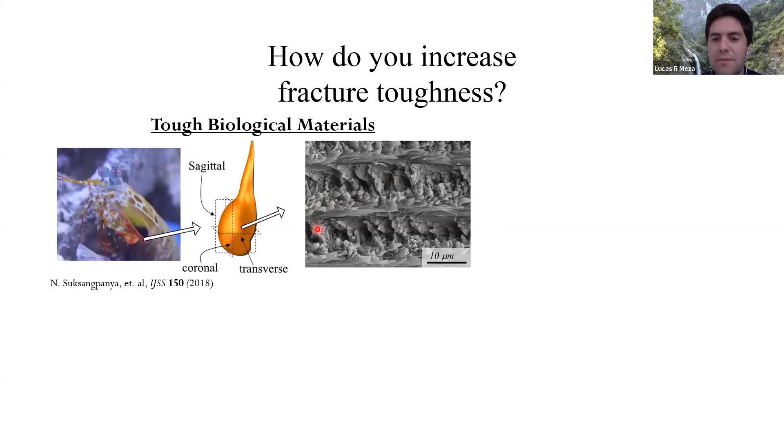So we wanted to see if we could engineer the toughness of a material. And to do that, we've started to look a lot into tough biological materials. So this is a mantis shrimp claw. It has this kind of interesting woven Bouligand architecture, kind of a twisted stack of fibers going along its length that change depending on the position of the material. So we've looked at tough biological materials for inspiration for how to create tough nanoarchitectures.

We're looking into the role of size effects. So fracture is a really complicated process that depends on the size of a crack, the sharpness of a crack, and the organization of materials in that crack or in the process zone. We can now actually engineer materials at just about all of these different length scales. This one's a little bit tougher, but we can engineer materials across these different length scales to see if we can incorporate size effects into our materials. So using this idea of statistical increases in strength, statistical changes in fracture mechanics to change the toughness of a material.

And so from those tough biological materials, Zainab has been designing these micro fracture tests. You can see we can create these sort of woven Bouligand structures that qualitatively mimic that of biological materials. We can create micro 3-point bend specimens. Eventually, we're going to be working on pyrolyzing these to do 3-point bend tests. We still have a couple kinks to work out, but we're getting there. She's been making some good progress.

In parallel to that, Nishita Anandan has been working on creating tough interfaces. So this has applications in, again, thermal barrier coatings, where you have large thermal gradients that cause these layers to crack and delaminate. So you have these cracks forming at these high temperature change interfaces. Here we're actually able to create nano-sutured interfaces where we can design different sorts of architectures at an interface to then create a thermally shock resistant material. And we can combine that with some of the ultra low K barriers that we were designing in parallel to create higher performance thermal barrier coatings.

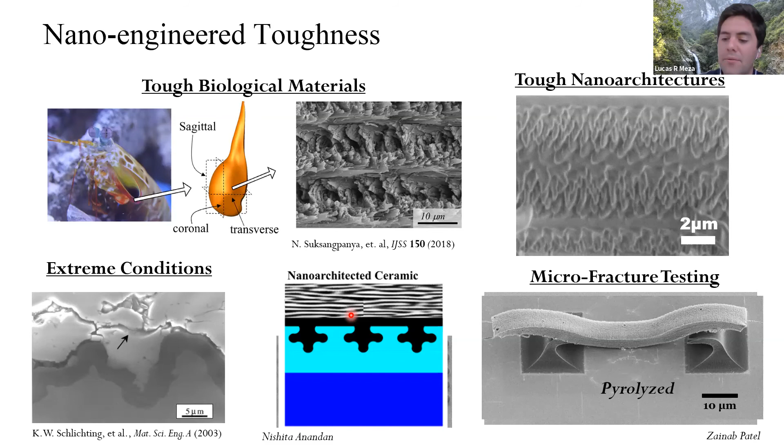So with that, I wanted to thank everyone in my group who's been really doing a great job, especially in the very challenging situation that we've been in. I've been really impressed by their ability to keep pushing through despite everything that's going on. I've had a couple of great collaborators here. I actually didn't even talk about all of the work that we're working on.

With Eric, we're working on some deployable biopsy tools. With Al Nelson, we're working on some 3D printable nano hydrogels. Marco and Vipin, we're starting to work on toughness of nanocellular foams. I have Rajiv Saigal in the neuroscience department, who we're trying to make nano-engineered needles with. Henry Lubatti in physics, we're working on some carbon fiber composites. And then Emilio at Imperial, trying to create hydrogen embrittlement resistant materials.

I'm going to unmute everybody so we all can clap right now. So I'm going to hit unmute for everybody, I think. Oh, sorry. I think everybody should be unmuted. I'm going to applause anyway, so there we go. Sporadic applause. There we go. Let's see. I'm going to go ahead and mute them all again. I was pushing the wrong buttons. I'll try that again next time at the end. But now we have time for questions from our audience.

Hi, Professor. This is Siam. I have a question. Is it possible to create nanoarchitecture on a curved surface?

Sam, can you create nanoarchitecture on a curved surface? Yes. Yeah, you definitely can. So with our methods, it's a 3D printer, we create arbitrarily curved structures, arbitrarily shaped structures, kind of in any organization. I think if you want to make things on a curved surface, there's different types of interesting architectures you can start to look at.

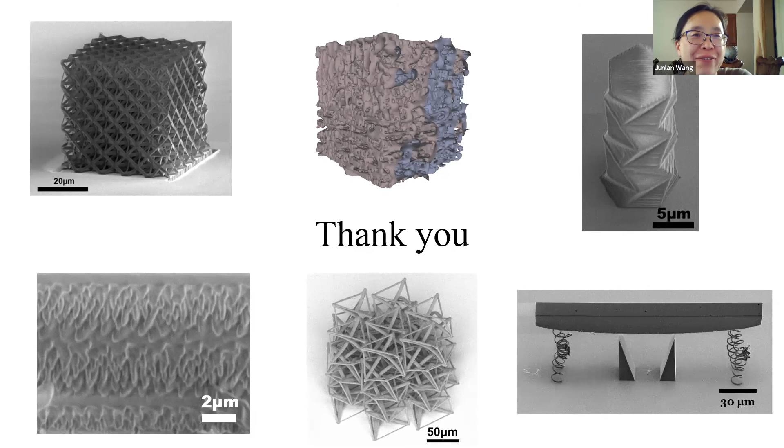Okay, thank you. Svenja, you had a question. Do you want to go ahead and unmute yourself and ask? Okay. Nate. Go ahead, June. Can I ask a question to Lucas? Yeah, go ahead. Very good talk, Lucas. Thanks. I'm excited to learn a lot of new activities in your group.

Interesting that in the last few slides, actually on the current slide, the Bouligand structure, is that something you made recently? How did you make this structure? So this was printed on the Nanoscribe. This has been some work by Zainab. We're creating beam structures that are supported initially by springs, so that we can eventually pyrolyze them and try to do a 3-point bend test.

But these are just different passes of the laser path. So you can imagine, we can control exactly in 3 dimensions how the laser is moving. We have voxel level control, all the way down to 150 nanometers, which is the spot size. So those are just line passes that she had been doing. So it's the same material, just going through different passes. Yeah. Okay, I see.

And so eventually those will be pyrolyzed to create amorphous carbon. So it'll be a brittle material, and we're looking at ways to infiltrate that with a secondary material. So just the Bouligand alone isn't enough to dissipate enough energy, although we might get some interesting crack redirection. But really, you want a soft polymer phase to dissipate energy. So we're looking at CVD Parylene as kind of a first attempt whenever we're allowed to actually try things out again. Okay, very good. Interesting. Thank you. Yeah, thanks.

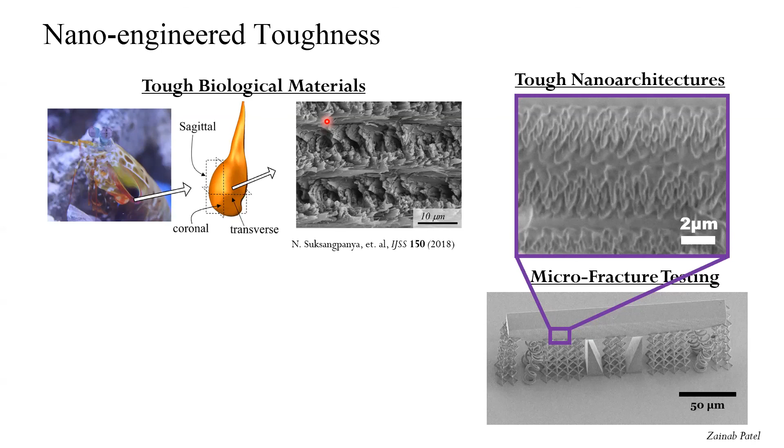You said that was for FCC metals. Is that true generally or only for those cases? And do we know why?

In general this happens for different types of materials. FCC, BCC, HCP generally holds, though I think that size effect is more pronounced in FCC than other materials. Part of the problem is HCP hasn't been studied as much because it's weird and complicated. Julia's group had been getting into that when I was leaving. But when you have prismatic slip versus basal slip versus whatever, it really depends on what orientation your structure is in, and you get pretty drastic changes in strength because of that.

But the mechanism for why smaller is stronger is that you have a statistical elimination of dislocations. So with smaller things, it's more likely to be single crystalline, and you have a free surface where if you do have dislocations, they can escape out of. Both of those still hold regardless of whether it's FCC, BCC, or HCP.

Does that answer your question? Yeah, I think so. I was wondering if it was just a smaller likelihood of there being defects in there, and it sounds like that's part of it. It seemed kind of counterintuitive that having a larger surface to volume ratio was beneficial, but in that regard I guess it makes sense.

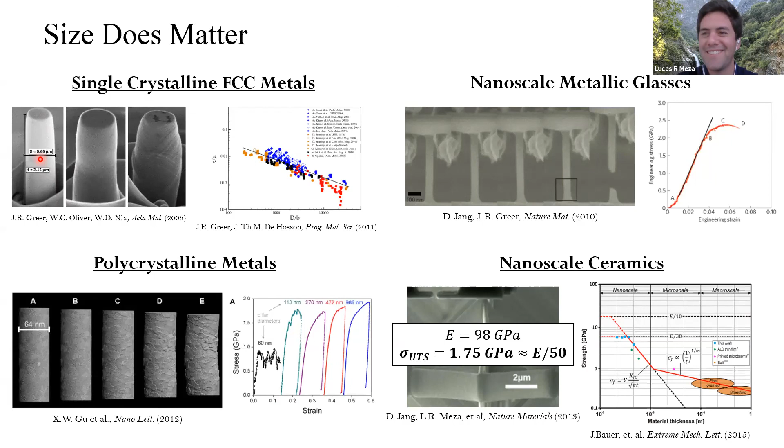We've been talking to a professor in Barcelona, Irene Arias, about creating piezo and flexoelectric actuatable nano-architected materials. She has worked a lot with piezoelectric and flexoelectric thin films, where flexoelectricity is based on the strain gradient instead of just the strain, so you can get an electric dipole moment coming out even with non-piezoelectric material. It's something we've been trying to get off the ground—that's very much in my mind. I don't have a student to work on it yet, but if you want to talk to me more, I'm happy to chat.